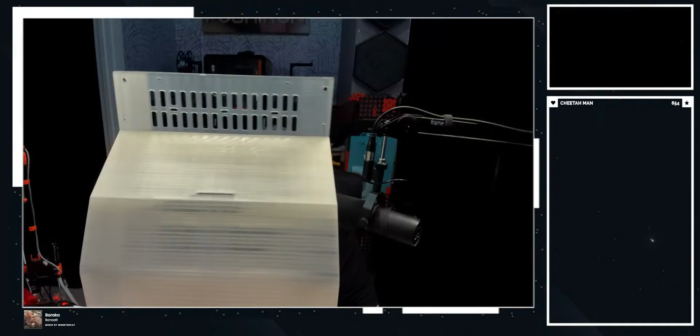So this is the latest version that we've printed off. Now this version was going to be kind of like the final prototype that I was going to install and see if this worked. But we have one problem, and that is there's a hole right there. Looks like I accidentally made a chamfer that was way too small on the whole thing.

So there's a hair in it. What's up, Robin? What's up, RJ? What's up, Geek Toy Box? What's up, Tin Talon? How's it going?

But one thing that this is also doing is a test for side plates. So that works. It kind of wants to fall out, so we have to figure out.

I know who you are, Geek Toy Box. I know you, you're my brother from another mother, Robert Anthony.

Anyway, so we have to figure out a method of attachment for this. Which that should be easy, just like a little flange with an M3. Should work just fine, and do that on both sides.

So that's what I'm thinking. Trying to think of anything else we have to do with this. I didn't turn anything on.

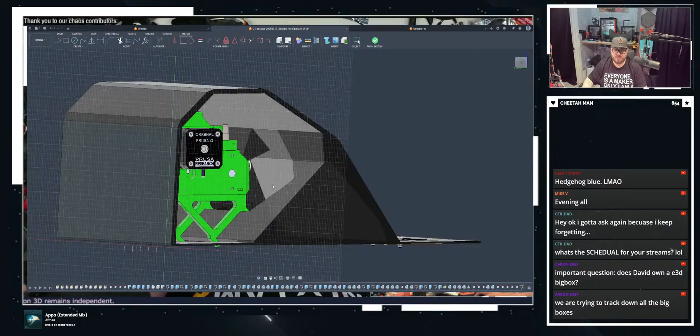Delete. Okay, now what we're going to do, real quick, we're going to create this. Now we will project that onto there. That is just for line reference. All right.

I'm gonna go ahead, extend that, and then from there - there we go. Okay.

I'm doing this the wrong way, but I also don't care. There we go, that gives us our center line. So we're going to do 4.2. That's 402. 4.2. There we go. Just right there.

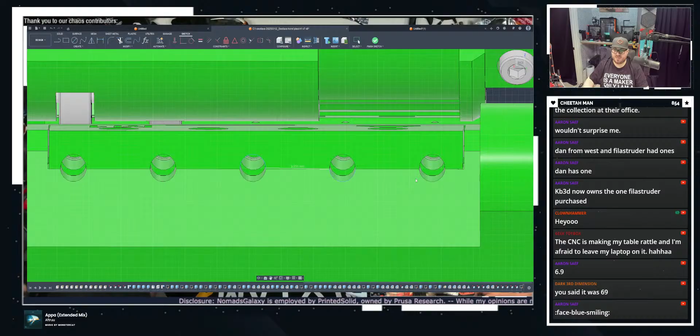Hold on, clear selection, let's do the bottom ones. 9.9. Okay, 9.9 is what we'll go with. Okay, so go here - rectangular pattern.

We gotta do this the fun way. 9.9, okay there we go. And then circle, but it's going to be a 2-point circle. That's going to be 4.2. Okay, do that one more time. That's a 2-point circle again. 4.2. Someone's gonna be yelling at me for like, why are you doing it this way? I'll be like, because I am a self-proclaimed masochist.

You should hear the story about how Dave Randolph designed the next-gen enclosures. He did it in an even worse way, but he did it great. By worse, I mean, oh my god, why did you do it this way? The program he used was the program that is for slicing. What he did was he programmed and designed the next-gen enclosures in a 2D application. He did not design them in a CAD. It is all 2D, there's no 3D modeling at all. It is just the raw CAD, or just the raw 2D laser files.

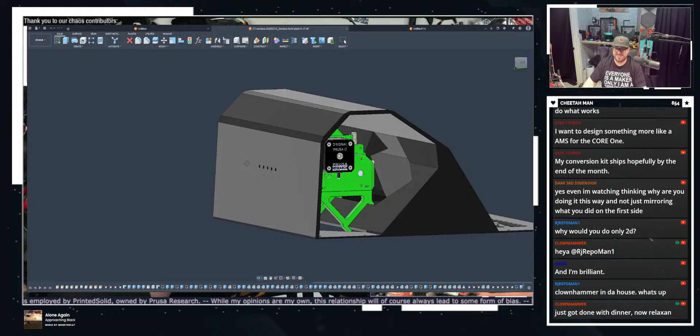I would not be able to do that. I cannot just think in 2D. There are some aspects of design that I could, but I am very reliant on visual. I am very reliant on, obviously, printing out test pieces and seeing how it looks still. Very reliant on that. So the next part we have to look at is we want to...

So that fits really nicely. That fits perfectly. That allows for print tolerances to be off and allow for things to connect just nicely. So we have to now account for mounting holes, essentially, just little spots to put an M3 screw. Now, I think we're just going to put a hole all the way through the whole assembly so the M3 holes don't really matter where they are. So I'm thinking one right here, one right there, one down here, and then one in a corner, I think. That should work, I don't see a problem with that. So let's figure that out.

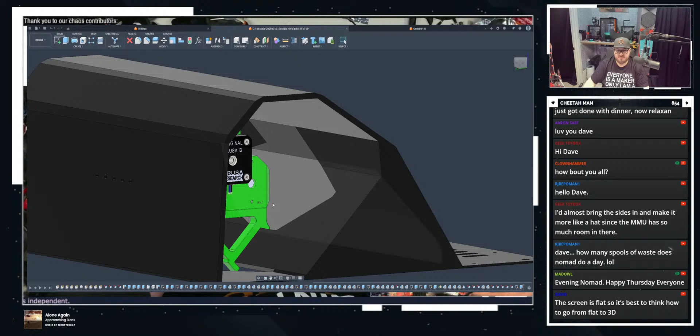Meanwhile, me and my fancy dancy space mouse. Okay, so now we just centered those holes because they were not centered, and I knew that if I were to release this, that would drive someone crazy. So that's now centered really nicely.

So, okay, let's go ahead and reveal these bodies here. All right, so right here is a great spot for an M3 bolt, so we're just going to do that. And we're just going to kind of bring this wing out a bit real quick. One second.

I don't have a... I'm just kind of vibe CADing. Are the holes centered on the MMU? So the MMU is, at least in this CAD, not centered, it's just kind of in a position. But in the official version, when you actually print it out, you can slide it back and forth a bit. So I want the holes to actually be in the center of the design, and then you're going to be able to find the center. If they're a little bit off, it should be fine. There's enough play in the PTFE to not cause too many problems. We'll see.

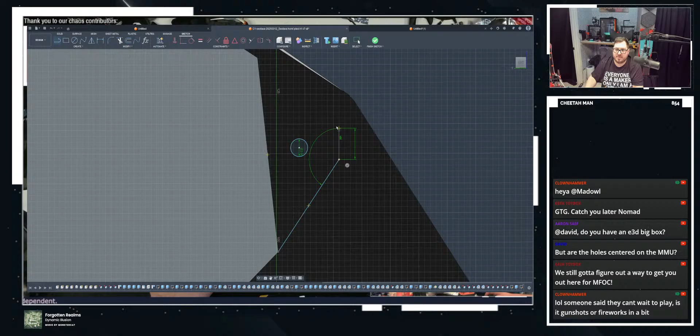All right, does this account for just a random M3 hole? Oh, that is way too small, that's going to cause problems. Okay, how about we do this instead? We're just going to put an M3 right here, so just 3mm. And then going off our really geometric, lazy design here, I'm gonna just do that. There we go.

You would know that if you did it in 2D. Yeah, uh-huh.

Probably. Alright, so here's a little trick that I like. Again, someone's gonna yell at me and be like, oh, you shouldn't do it this way. Actually, I already effed up royally, but whatever. I'm going to just go ahead and remove this body. Let's rename. Let's just remove this, because I am just going to mirror this when done. This CAD is literally like an example of the worst of my CAD. It's not well organized, it's not well anything, it's just chaos.

Anyway, so what I like to do in here, we're gonna go hit thread here. We're gonna set this to an M4. Nah, M3.5. So M3 will go through that perfectly fine. Well, actually no, hold on a second. M4. You can just use a hole tool. I like to use a thread tool because I'm insane.

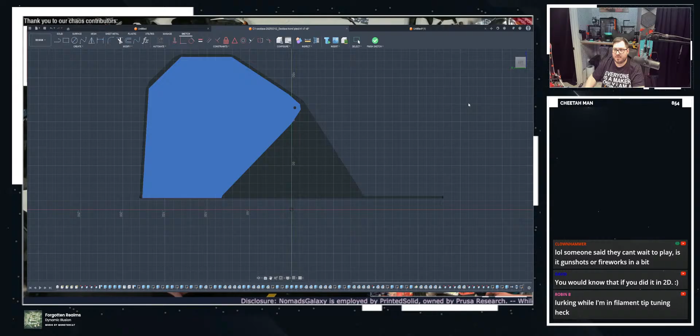So now, we're going to do this, project. We don't need to project the whole face. Just that. Okay. Finish sketch. Punch a hole all the way through to the other side. There we go. Now, we hide this. Now, for this, we're going to use the thread tool. Now, I'm going to do M3 modeled.

Now, your printer, especially if you have a Prusa, can easily replicate the actual threads of an M3 bolt. This is not a difficult thing for a printer to do. This will work perfectly fine for just holding something in. So that's what we're going to work with here.

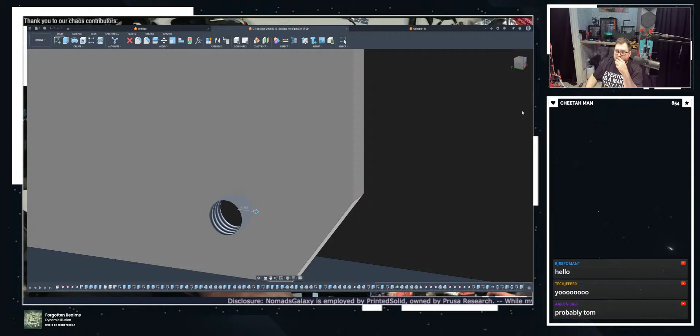I'm so doing this the worst way possible. If I showed Mitch how I was doing CAD right now, I think I'd make him cry. Mitch is a freaking wizard of parametric CAD. He figured out how to do some stuff at work, and it's fully parametric, and it's insane that he was able to figure it out. Dude's a wizard.

Isn't it 3D? I really should change the name of the stream. If you think you would cry, you're doing it right. I guess so.

I wish I could show you some of the CAD I do for work, because I assure you, it is way better organized. I promise you. I actually go into the subcomponents and only model them when needed. I actually tile things out appropriately. I do a good job, but when it's like this... At work, you're going to do a really nice job. It's going to look really good. But then at home, you just kind of slap things together because you know it's going to work. At least I don't have any red in my timeline.

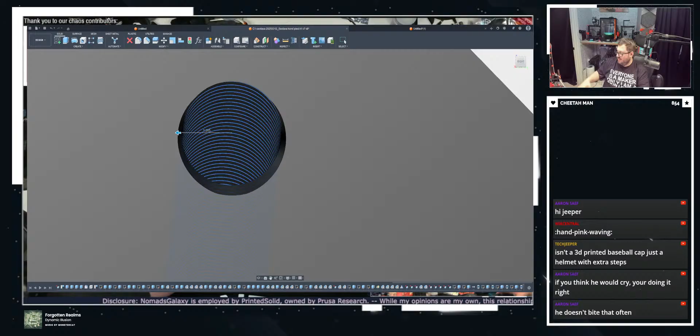One day... Well, if you want to see the kind of CAD work I do at work, just download the Positron CAD. It's similarly done. It's actually organized and easy to understand. So, there you go. That's the one thing you can look at. Eventually, there's other CAD projects I've worked on that are also similarly organized. I just can't think of anything currently.

Okay, so there we go. We got two points that work.

Can we get a Dave interview stream? I would like to do that. I would very much like to do that, actually. Honestly, working and talking with Dave is truly just an awesome thing. Definitely one of the highlights of my career. I was saying today, we had a little party today, and it was so much fun. People have told me this, but I can say with absolute certainty that I'm so happy where I am right now. I'm like welling up real quick.

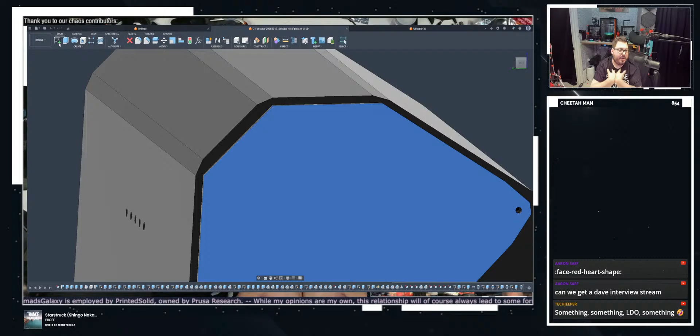I've been in the IT field for 10 years. And I was really nervous about this job because when you do something for 10 years, most of the time you can say that you know how to do it and you know how to do it good. And I know how to do IT. I'm confident in my IT skills. I know how to be a network admin. I know how to set up servers. I know how to do this, that, and everything else. I am confident in my ability to be an IT administrator.

When I was prepping for this job, I was honestly really worried. I was terrified because I went from one job that I've been doing for 10 years, and I've been told that I was doing it well, to a job that I have no formal training on. I have absolutely only hobbyist level skills in, at least I would like to believe.

I was nervous, and I think anybody would be. It's entirely normal and natural to be nervous making a jump like this, going from doing just IT work to then professionally doing engineering work with no formal education on the matter.

Weeks, if not days after I started at Printed Solid, my dandruff went away. My general anxiety was significantly reduced. I had a reduction in my depressive episodes, and this weight that was on my shoulders just lifted.

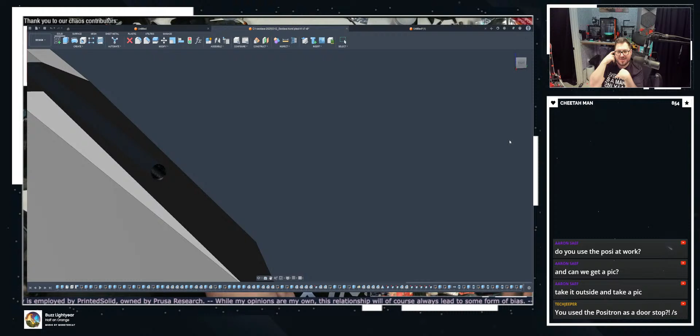You use the Positron as a doorstop? No, no. We printed a Hodor doorstop. It's great. I love it. Came out perfect. Best part is I printed it on my Positron before it broke. I still need to fix my Positron.

I will say, when I go to Open Sauce this year, it's going to be the first time I don't bring a Positron with me. I'm gonna be packing light this time. I don't want to bring a Positron because I just want to be able to bring my clothes, and I don't want to have to worry about it. Essentially, when I was going to Rocky Mountain, when my flight got canceled, my Positron was in my checked bag, and that ended up in Colorado while I was still stuck in Philly. So I don't really want to, I don't know.

With the current tariff situation, it's difficult for me to justify bringing my Positron, because if anything were to happen, it will not be cheap to get a replacement. Like, if it was before the tariffs, I'd be able to be like, hey, Jason, this happened. What can we do? And Jason would probably be like, here's a new Positron. That's no longer plausible because of how expensive it would be to do that. So, yeah. Get a medical device sticker? Right. Maybe. Don't know. I'm not allowed to do that. Mitch could do that, because he has a CPAP.

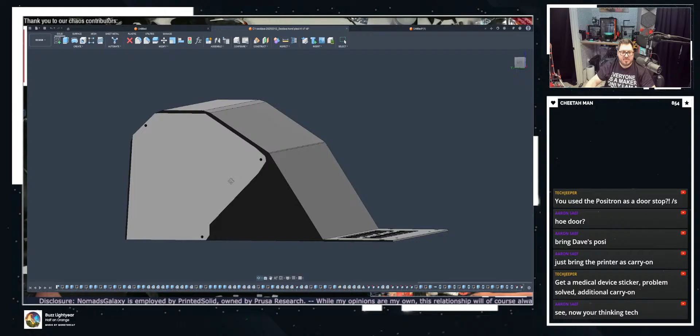Alright, I think... Why is that there? Delete that. I think this is good. This should be enough to just hold it in place. Like, I'm happy with that. Yeah, it's a 3-point hold. That should hold just fine. Yep, okay. So we're going to go ahead and reveal the construction plane. Mirror. Mirror plane. There we go. So just like that, we have the new side panels.

I'm nervous about how thin this wall is. Oh, that's fine. That's 1.7 mil. That's going to be fine. That won't be a problem, especially since I modeled it all the way through. It's not going to be bulging at all. Okay, now, before I decide to print this again, let's just look at the geometry, see if there's anything else we want to do in here. I'm pretty happy with this right now. That's going to be a bit messy, but that's fine. That doesn't have to be nice. Is there a purpose to having it go all the way through? No. I'm just doing lazy CAD.

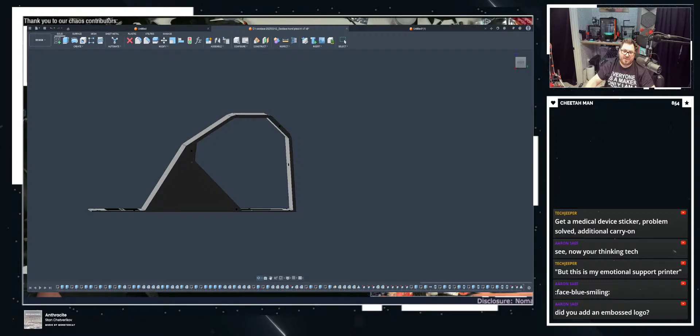This turned out to print really nicely. Did you add an embossed logo. Nah, I'm not going to do that right now. Because this here, it's very thin. To try and give as much room in here as possible, it's very thin. Because if we bring back the MMU, like, I can... Let's do this. Let's give it just a little bit of thickness in spots where we can. Let's actually come in here and start improving some things a bit. Because now that we can do this, this will just make things look a little bit nicer once printed. So now I can go up here, delete that, add that rounded edge, do the same thing here.

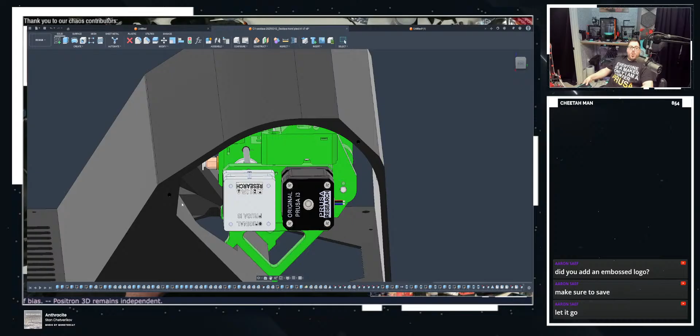It did not like me doing that. Come on. Yeah, okay, it did not like that. I really hope this doesn't crash. You know, that would have been useful to think about a moment ago. But now it's frozen, and I did not think about saving it a moment ago. I should have done that. Alright, well, we wait now in terror, as we wait and see if everything I've done gets lost. Oh boy. Let it go.

The mouse is spinning. The mouse is spinning still. Still loading. Oh, yeah, thank God. Save. Save. Save. Okay. Alright, we Gucci. We fine. We good.

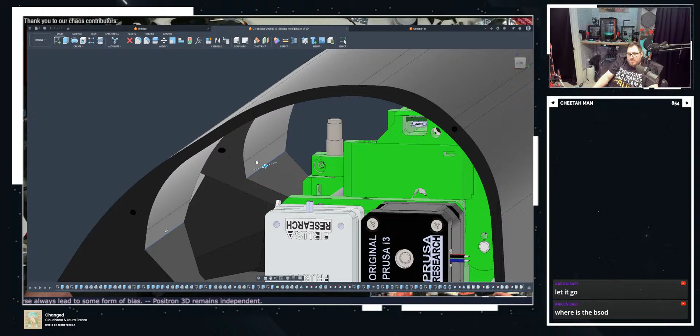Now, admittedly, the more geometric shape of this matched the design language of the Core 1 a lot better. But I don't want it to be a big box on top of the Core 1. I'd rather it have a little bit more personality. So, yeah. That is already so much better. Let's see. Yeah, that is so much better already. It's also gonna just print a bit nicer. Just a little bit. Alright, I'm gonna leave this pretty rectilinear.

Alright. I'm going to modify this a little bit because the sliding part is actually underneath these grills. So I am totally fine with this looking a little bit different, as long as we don't change this too much. Oh, God. Alright, start with 20. Let's go 25. 30. Okay. 35. 40. 45. Doesn't like 45. Okay, 42. Doesn't like 42. 41. Doesn't like 41. 40. 39. 38.

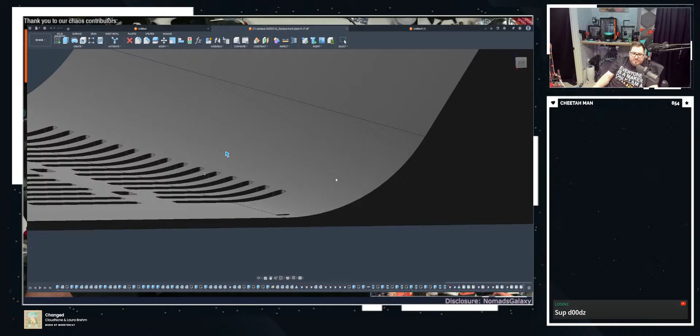That's just going to make things look a little bit nicer. Okay, I'm trying to think what else. It looks a lot better, but now it looks more like a duck bill, admittedly.

Alright, I'm gonna fillet a thing. We're gonna fillet it by doing this. Please don't break. Please don't break.

Please don't break. Note to self, make sure to check the simmering pasta sauce is actually simmering. Yeah, you should probably do that.

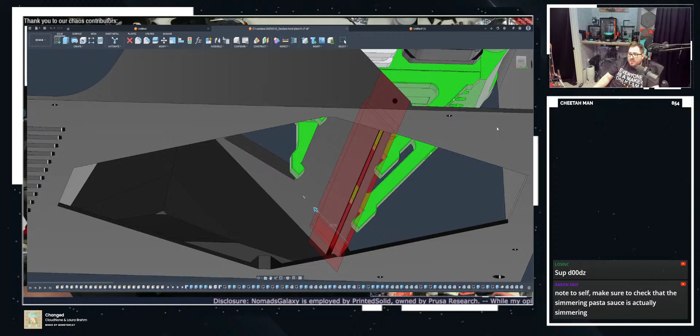Okay. Then we do join. Is that... No, it doesn't get rid of what I want to. Okay. Those threads will just be there. This is fine. This is fine. If I really want to do a really long M3 rod all the way through this, that's going to be great. It's going to be really helpful right there. Okay.

Before I print this, part of me wants to start thinking about how we can make this fit on a Core 1. I mean, the simplest solution is to cut this into 4s. That's entirely possible to do. So if I do mid-plane between there and there, now I can split this into quadrants, and it looks like... Hold on a second. Split body, you, along here. Huh.

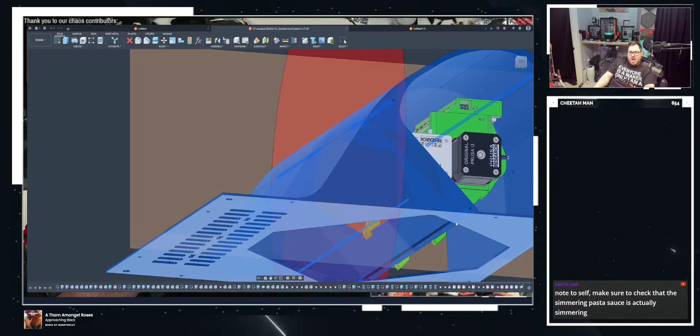I mean, it's going to mess up printability. Only to some degree, though. Okay. That's something to think about. This might work out a lot better than I thought. Okay, so if you do that, that splits essentially these two into two, and it looks like, for the most part, it keeps the MMU chamber on its own part of the print, which is good. We want the MMU chamber to remain independent of everything else. And then when we split it like this, it just splits the MMU chamber into two. So, realistically, we would just have to figure out a way to align everything and to screw everything together, and that's not difficult to do. Pretty happy with that, actually.

Because, yeah, an MK4S bed and a Core 1 bed is roughly larger than half the size of an XL bed. So splitting up into those quadrants shouldn't be difficult to do. It's all the alignment that we have to do after. That's the hard part. Now, I could tell people that you have to use glue. That's not an unnecessary thing for people to do. And that actually can be made relatively easy. But with how thin the internal geometry of this is, that actually wouldn't be that simple.

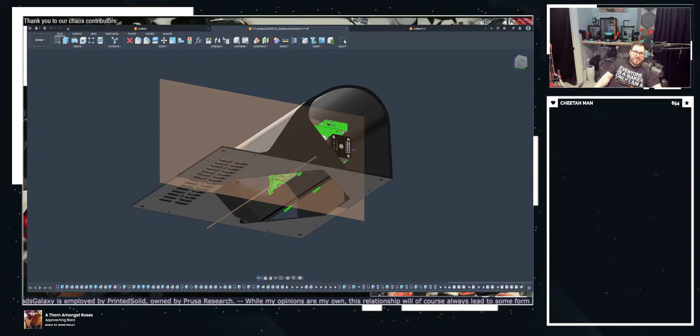So, let's see. I have no idea how this would work, but you know what? I'm gonna print this all in one go, and then we're gonna try. So save as mesh. Baseball cap rounded. I'm gonna pull out the slicer. Now I'm gonna try and make this use as little filament as possible. Can't be too little, has to still be enough. But I would really like to not waste a lot of filament on this. Okay, Prusament PLA. Sorry.

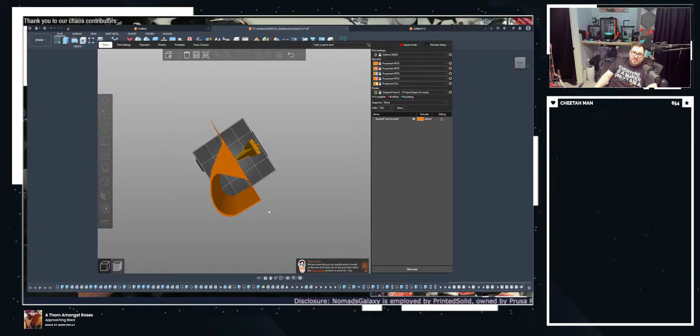Okay, here we are. Now, I designed this so that you can print it like this if you want. There's going to be some overhangs if you do it like this, but this is a completely valid way to print this. I prefer this way. That's just me. So we're going to go ahead and rotate this 90. Yep. Put that right in the middle. There we go. Okay. Now let's do 0.25 structural. We're going to go into settings here. Yep, we're going to leave that. We're going to go infill. We're going to go gyroid. Or we could do honeycomb. Let's see what honeycomb looks like when we do that.

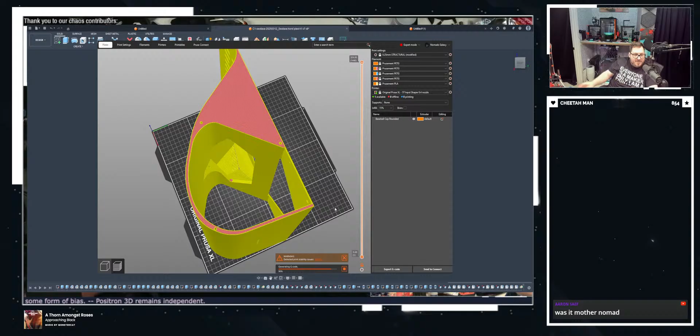I gotta text somebody something. Alright. I just issued a mission to somebody. That's gonna be fun to see the result. Was it Mother? Nah. Anthrocon is happening currently, and I have friends. I have two friend groups that are going to that. One of them is from the Positron group, and another is just other friends that I've had over the years.

And so I just messaged my friend in the Positron group. I said, "Hey, find this group," and I sent them a photo of what they are likely to have as a logo on one of their shirts, and I said, "Tell them Nomad sent you," because it's gonna be really funny if they run into each other. So we'll see what happens.

Okay, I am happy with this. I really am. I don't know if I can improve upon this currently.

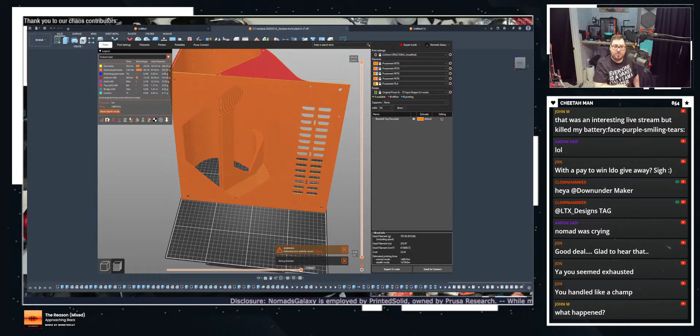And I think this is more of a cultural difference between LDO and the United States. I don't believe they fully understand the legality of how some giveaways work.

And very specifically, since we are not doing a contest—this is not a contest sort of giveaway. A contest needs to be registered in order to actually be legal, because then you are competing in order to win something. A giveaway where you just put your name in requires nothing whatsoever. That's different, because there's no competition needed in order to win the item, and it's equal, because there's no purchase necessary.

There's no legal things you have to worry about. You can just do it. And then the person who receives the item, if it is of substantial value, will have to mark it on their taxes, because it is technically a gift.

So if you received something like a Prusa XL, you have to mark that as a tax write-off, as a tax item, because you have to pay taxes on any items that you win.

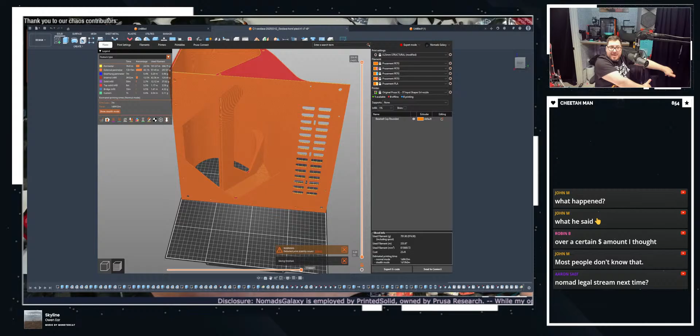And so if you win a Lamborghini, cool, you have to pay taxes on it at market value. That sucks. So be mindful of that. If, for example, you get the option of winning a vehicle or a cash prize, take the cash prize so that the taxes can be pulled from the cash prize, and then you can keep the cash after that. If you choose the vehicle, then you have to pay the taxes on the value of the vehicle, and as such, you can get screwed over if you don't have the money for that. So a lot of things go into that.

Now that I think about it, I think $20,000 is the limit, or is it $5,000? It is whatever is the limit of what can be considered a gift. And I believe that law is very specific to things such as inheritance in a will—if you give a certain amount of money over a threshold, you have to pay taxes on that. I believe. I don't remember.

Again, I am not a professional legal individual, and I am not a financial advisor, so take everything I'm saying with a grain of salt. Please do your own research. Please consult experts in these subjects. I'm hoping to just spread awareness that this is a thing that does exist. It's not necessarily exactly what I'm saying.

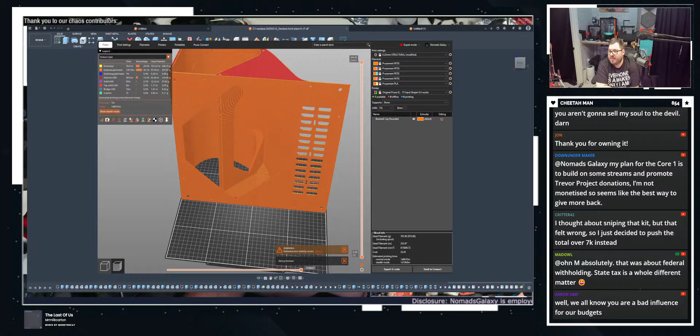My plan for the core one is to build some streams, promote Trevor Project donations. I'm not monetized, so it seems like the best way to give back.

Sorry, let me catch up on chat here. Yeah, people who win the Price is Right, yeah, $600, oh interesting. Hopefully pay to win charity won't happen. Yeah, hopefully not. Don't worry, I didn't get an email about winning, you aren't gonna sell my soul to the devil. Nope, not happening. I thought about sniping that kit, but that felt wrong, so I just decided to push this. I appreciate that, man, I really appreciate that.

Absolutely, that was about federal withholding. State tax is a whole different matter. 100%. Well, we all know you're a bad influence for our budgets. Yes I am. Buy some Jesse. This is a threat.

One of my favorite lyrics is from Streetlight Manifesto, and it goes, this is not a threat, but it's a promise we will keep. The full context is necessary though, let me pull that up real quick.

Streetlight Manifesto, This Is Not a Threat. It is The Hands That Thieve. The chorus literally goes: and I don't care if I lose because my heroes did too. They shouted court should be adjourned because the jury are fools. And the judge can't decipher his left from his right or his right from his wrong. And we will bite the hand that thieves, we will not turn the other cheek. This is no threat, it is a promise we will keep. So what's the point pretending when we've seen behind the curtain and there's not much to see?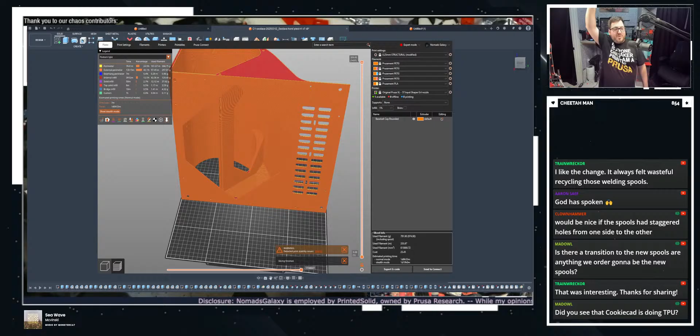David says if you stagger holes, then you would need two different molds and double manufacturing costs. Yep, exactly, it's always those minute details. David's great for remembering those minute details. So many times me and Mitch are like, 'Oh, but we can just do it this way,' and then David's like, 'But just do it that,' and it's like, 'Oh yeah, that's a lot easier.'

The one problem with hiring two people that overcomplicate things - like, yeah, you hire the guy that does the upside down 3D printing, and then you hire the guy that does the backpack printing. We come up with great ideas, sometimes we overcomplicate them way too much. You could say we're a little short-sighted.

That's good. Yeah, minor changes. Alright, so now this uses only 781 grams of filament. I love how we went on that tangent while we waited for this to slice here.

I didn't get here by doing things the hard way, I'm lazy. I have a saying I've been saying for years: innovation is driven by laziness. We innovate because we don't want to do the work. Why do you think we invented texting? Because no one wanted to actually make a phone call anymore, it was just easier. Why do you think we invented smartphones? Because getting to a computer was too cumbersome. We do all these things to simplify our lives and make things a lot easier.

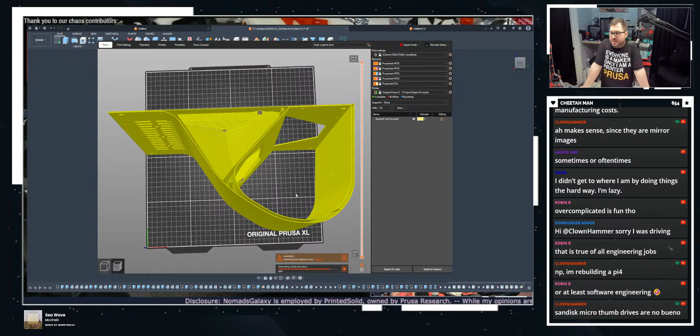Overcomplicated is fun, though. I mean, look at the top hat we're making here - this is definitely overcomplicated. 100%. It will work, and I'm glad it's gonna work, but this is definitely overcomplicated. This is why I do this on my personal time, not on company time. Anyway.

So let me put this on the Core 1 so you can see what it's going to look like. That's not bad. That's not bad at all, actually. I thought it would look like a weird humpback whale. That doesn't look like a weird humpback whale. I like it.

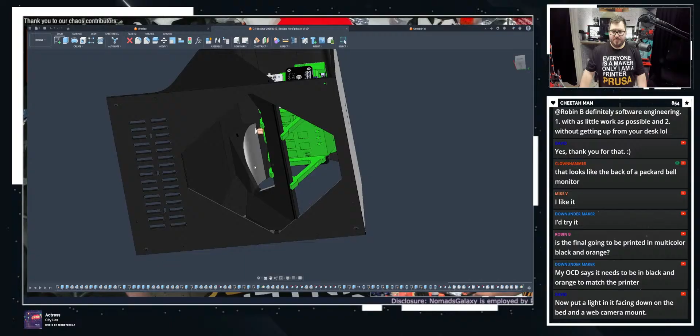So let me hide the construction planes. What we should be able to do is put an LED strip literally directly underneath the MMU here, and that's going to give some backlight as well. These here, you have a lot of space to actually attach LEDs to the entire bottom part of this, because it literally just replaces the top acrylic panel. You can do a lot with this.

One of the things I'm thinking of doing is there's a ton of headers, and I think this is actually a populated board on here, so we can actually look at it. One second. Where is this board? Okay, let's isolate that. Where's the isolate button? Did they move the isolate button? They better not have. No. No. Did they? Show all components. Holy crap, they did. Why would they do that? Well, that's annoying. Anyway, we'll just look at the ghost of it.

There is a lot of unused headers on the MMU. So we should be able to siphon some 5-volt power off of this without causing any issues. So we could use that to power a couple LEDs. Shouldn't be too much of an issue. That should be a very simple DuPont connector modification.

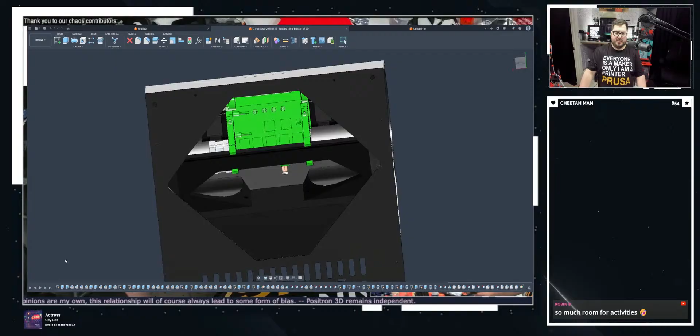So since this is using the push click DuPont connectors, it's compatible with DuPont plugs. We should be able to create essentially a male to female DuPont connector to just bridge the two DuPonts and then literally split off some 5-volt wires so that the LEDs turn on with the MMU.

And technically, I'm just surprised, like, no hexagon shape. We might. This is still prototype proof of concept. I rounded everything off. I'm not a super fan of how this looks. It looks a lot better than the first prototype. Let's be real. This is already leagues better, but definitely already thinking about where to put some hexagons. Definitely already thinking about that.

Everyone here will ignore us till we grow. Hey, what's up, Taylor? I just got back from that Streetlight concert last week. That was so good. So excited for the new album.

So, for context, here was our first prototype. Yeah, this ain't great, Chief. It works. Like, the MMU is able to mount in there, but yeah, this was not good at all. This was the mounting proof of concept. I probably should have not printed this as complicated as I did.

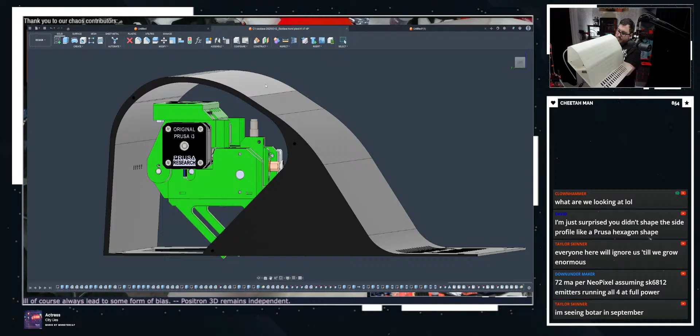This was the previous iteration. And you can access, I'm using the Ulti-Multi. What's nice is that I can actually get my hands in here and do some blind stuff. Obviously, the PTFE tube fits really nicely, so that's good. Actually, removing that PTFE tube is not necessarily easy, but if I kind of hug it, we're definitely going to have to design like an access door. This is gonna be one of the oversights of this design, like 100%.

Oh, come on, seriously? Did I say this was a prototype? Oh, come on. This isn't wanting to come out. Oh, seriously? Got it. An access door would go a long way to make this whole situation a lot better. There we go. So now let's look at the new one.

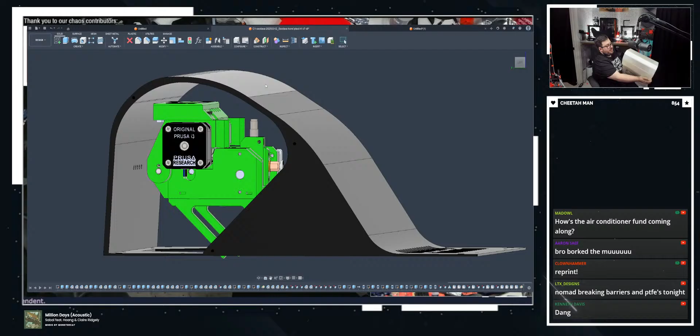Okay, so let's go ahead and put this in. I do really love how that just clicks in. I mean, we could design a hatch for access. I feel like we have enough material to do that. I'm thinking here. The question is just how would we seal it? That is the important question. How would we seal said hatch? And honestly, I don't want to deal with that right now.

But we do have to deal with the cable. We have to figure that out. I can't just do the cable as it is right now. It has to come out the back. So what we need to accommodate is this connector here.

VHB. Yeah, VHB is something we can do, but Nomad breaking barriers and PTFEs tonight. There we go. Alright, so...

The MMU is not designed to be mounted in this orientation. It really relies on gravity. Okay. So, we have to account for this connector here. Just out the back. And then, honestly, a hole only as big as this would not cause many issues for anything. So...

Okay. I do still love how this turned out in PETG-CF. This looks so good. Anyway. Let's go ahead and just unplug this. Yeah, so if we look at this, actually there is a, hold on, let me swap over to the live view here.

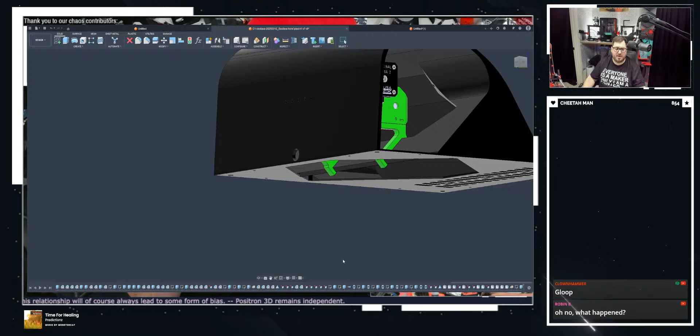There we go. And then the MMU cable will just drop down through there, connect to the MMU. Now, what I could do is on this side, I could make a little insert that is specifically designed to go around this cable. And that's what we'll do.

Who's messaging me? We'll find out in a second.

So that's going to be 8.4. Yeah, it can be TPU. Alright, so we edit this again. And then we're just going to do simple. Right here, 8.4. I'm going to bump it to 8.5 just for some safety margins here. And then I'm going to take this, extrude this out. What? The object you're creating is not visible. Oh, well, that's why. Alright. Yep, 4 mil should work.

Okay, and then what we'll do here, another new sketch. I want this to kind of just slot over the cable. It doesn't really need anything fancy. So we're just going to drop that down. Use offset. And then we're going to do 2 sides. And then, so we did 8.5, so we want to do 4.25. Sketch. Oh. Shit. Go back into the sketch. Okay, that's being weird. Let's connect these two, I guess. There we go.

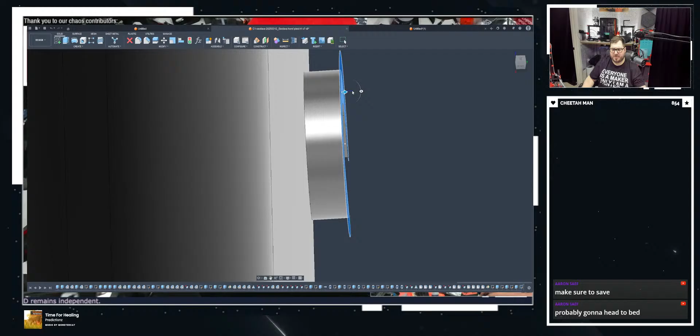Alright, then we just take those, and we drag that out a bit. Just needs to be like 2 mil, nothing crazy. There we go. And we just take this, and that, and we're just going to kind of round that out a bit. Just like that. There we go. Take that and that, do the same thing. There we go.

All right. I'm really starting to think that I'm just going to make this a thing you print on the XL. Because the idea of... Oh, shit. Oh, no. I forgot to account for this. These are still geometric-ish crap. Hold on. Gotta remove a body. Remove. Okay. Hold on. We can fix this. We can fix this. Left.

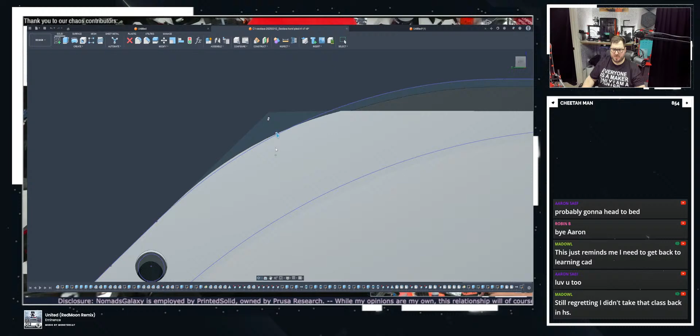Project. Okay. Finish sketch. Okay. Then what we do here is we just go in. Watch this. Watch this. And we just do this until it kind of matches. Again, not the way you should be doing this. At all. But it works.

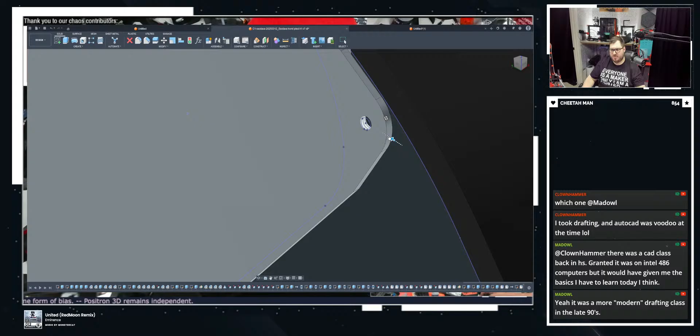Nah! Too much. That's touchy. There we go. That's okay. That's really touchy. Wow. Okay, hold on a second. Let's just do that. You and you. Okay. Then you. Nope, not you. Then you. And you. Oh, God. Okay, there we go. Cool.

Okay, then add new. Done. Whew. There we go. That makes my life easier. It's not perfect, but it does kind of unify the design language that we've moved to. So, yay.

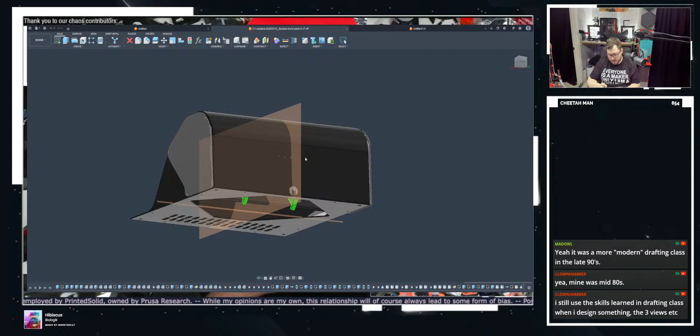Now, I've started adding an Easter egg to what I CAD, and I'm gonna let you guys in on this Easter egg. Actually, do I even have it uploaded? I don't. Okay, I'm gonna have to upload the Easter egg and then show you guys another time. Essentially, I've been putting Callie on as many things as I can, because why not? What's fun is that if it's for work, I put a little doggo, little Jesse.

Okay. I think I'm happy with things. It's alright if that's a little, you know, edgy there. Oh, excuse me. Where's the isolate button? There it is. Yeah. Chamfer. Let's just do about right there. Pull that back. The MMU does not require ventilation, from what I understand. So this should work just fine.

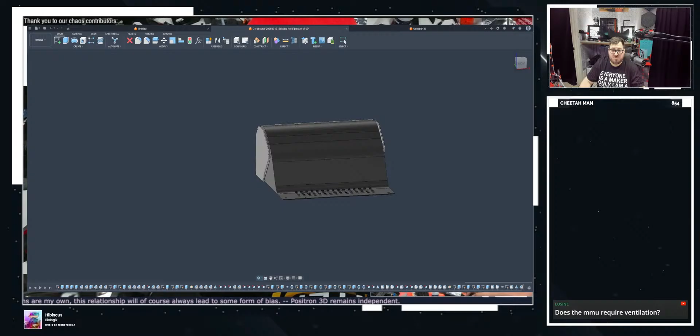Alright. Unisolate. There we go. And hide construction. Alright. Save. All right. I wouldn't call it stylish, but you know what? I'll take the compliment.

I wish I could do more, but I need to keep this part flat because this has to remain essentially as thick as the original acrylic, especially in this middle area here. Because if that was any larger, then that would just be problematic. So I have to leave that.

I missed a boatload. Family is very confusing. Well, hey, welcome back.

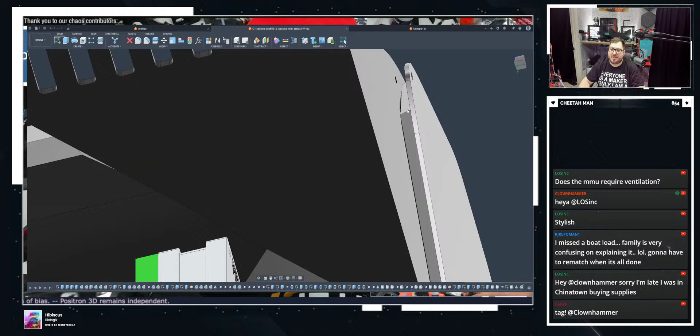This should work. Oh no, this won't work. Oh no! We changed the internal geometry. Okay, this is a relatively easy thing to fix, but we did change the internal geometry. So I'm gonna remove this mirror here. Alright, we're gonna isolate this. Because we changed the internal geometry, all of this is now broken.

Unisolate. Let me isolate you. Why won't you let me isolate you? Okay, fine. Alright, so we have to delete this. All of this. Yeet. Yeet. Yeet. There we go. Deleted. Okay. So, take this back.

So we're going to go ahead and create a sketch plane right there. Okay. We're going to project this. Okay. Now we're going to hide this. Now, what we're going to do is we're just going to take that internal, hit cancel, internal chain selection, that whole inner portion. And what we're going to do is we're going to just drop that by about -2. Just like that. Okay. Finish sketch.

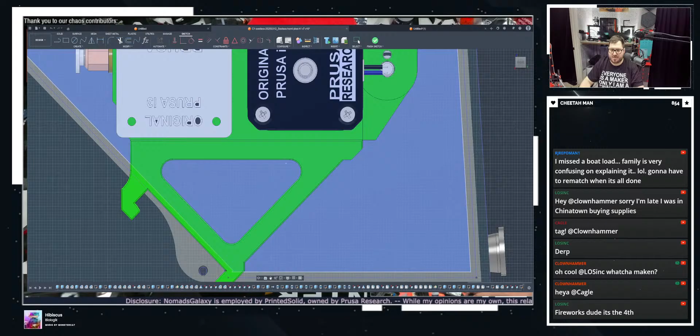Reveal the sketches again. And we're going to take that. Yeah, that should work. Actually, let's undo that. Nope, let's redo that. And we edit the sketch. And let's edit that to -3. Just want to see if that changes this corner here. Yep, it does. Okay, cool.

Okay, so then we grab this and we extrude this by like 5 mil. 5 mil will be just fine. Hit join. Now we have this internal thingamajig. So we're gonna go ahead and round this a bit. There we go, just to make things a little bit easier for us.

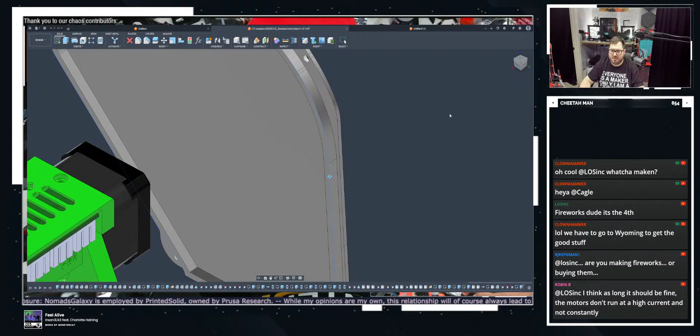Okay, now we take this and let's see. Will this let us? No. Okay, let's undo what we just did. And let's see if this lets us do what we want to do. Okay. Let's do equal distance. Okay, so let's go over here and do it there. And then whatever this was, let's paste it. Okay, so let me do that. Cool.

That's weird that it stopped right there. Okay, so let's do it again. Oh. Uh-oh. It didn't like that. Okay, we're just going to remove that. Okay, that doesn't like that either. Just do that much then. I'm not liking this. Like, this will work. This will work, but I don't like it.

What I don't like is this corner here. I really don't like that. So what I'm going to do is I'm going to select that. We're going to hide the MMU because the MMU is just getting in the way. Take that. Oh, I see why I really don't like it. Okay. There we go. Finish sketch, and then we're just going to flatten that piece. There we go. That's much better. That is so much better. Holy crap. Alright.

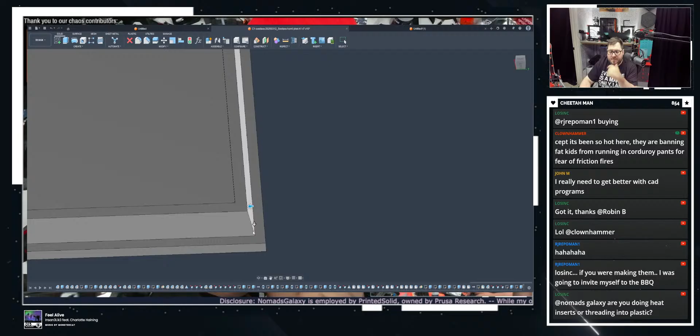There we go. So by removing that little spur that we had there, immediately everything's going to fit. If we bring this back in... Yep, that's fine. That is a totally fine thing. That works. Oh, hold on a second. Did I forget to measure this? What's the distance? Oh, yeah, we're fine there. Alright. Okay, that looks a lot nicer now. Especially now that that kind of works with everything.

I'm happy with it. This looks weird. I don't really know how I'm gonna fix that. Let's try. You know what? Let us try and fix it. So let's do this. Let's do the offset here. Now let's kind of line it up right. Let's do this the right way.

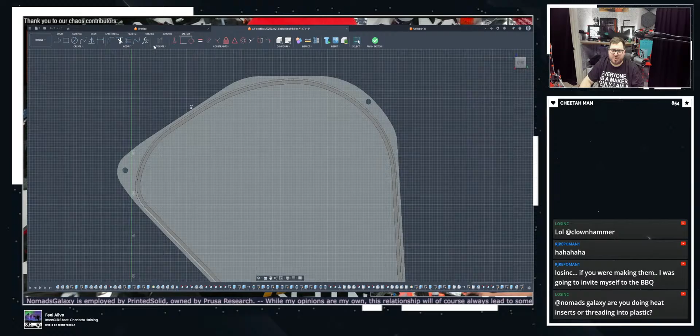Let's measure the distance between these two. It's 1.75. Okay, so we're gonna go in here. We're gonna make that 1.75. 1.75. Okay. There we go. So now, yep, that's its own thing. We leave that. This is just us trimming some stuff up. So yeah, this is the only weird part. We're gonna hit finish sketch, and we're just going to slice that off. So now it is uniform to the shape of the entire piece.

Oh, that's so much better. Look at that. That's just so much better. It's subtle. It's very subtle. But it's better. So we got 3 points of contact. That does mean that this is kind of going to be a little loose, but like there's not much material for me to work here.

Needs some branding. It does, but for now, we're not going to worry about that. Just don't want to be bothered. Branding is fun, but it does take effort.

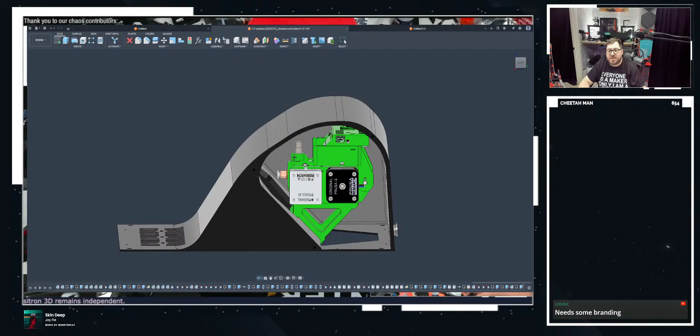Alright, I'm really trying to think what else is critical. What else do we really need? What do we need versus what is a want? I want to have a hatch here for accessing the MMU. And that does technically count as a need. Like that is technically something you need, because trust me, you want to be able to access this thing. But can I live without it? That is the question. This is going to be multiple prints.

Or is it different colors for multicolored? I mostly use my MMU as a buffer, so I can have multiple kilograms of filament loaded into one machine. That's how I normally use it. But yes, I typically do have a contrasting color in there as well. So if I'm using black, I'll typically have white, so that I can do things like text and whatnot. So yes, it is mostly for filament runout, or what Prusa calls spool joining, but it is also for multicolor when I want to do it.

Oh, talking about the Fusion screen, it's black and gray. That's a new feature that you can enable. It's a preview feature. All right.

Yes. More RGB, access to the MMU3 is a must. The RGB can come later with tape. I'm not worried about that. I am worried about access.

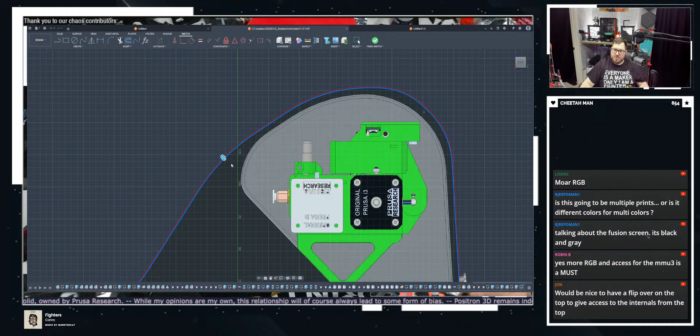And my problem is I don't know how to solve that problem right now. Yeah, I'm thinking of flip top cover as well, but I'm trying to figure out how would I... Hold on. I may have just figured it out. So let's go here. Let's do a reverse. Okay. We're gonna hit OK here. Alright, so we're gonna do it just above this hole here. Yeah, right at that green line. Okay, watch this.

So I'm actually gonna do circle, 2 point. Just like that, right? Watch this. Project that line. Done. Okay. Now that's weird. Oh, right, because it's... Yeah, that's gonna be a thing. Okay. That's all the way through. I could reutilize that.

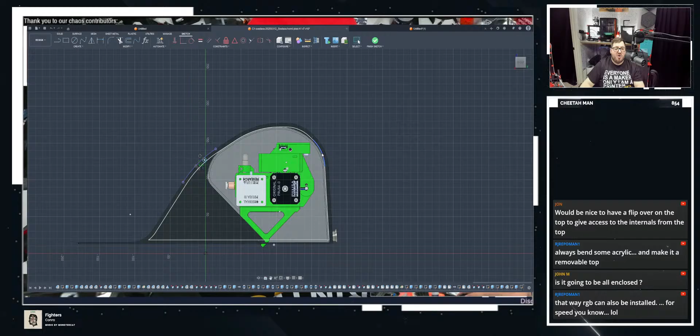Do I? I could reutilize that as a pivot. I could make this a really simple thing. I'm gonna have to add a screw point down there, though, if I do this. Okay, so we're gonna do it. Essentially, go here. We're gonna do to here. Then have that attached there. Make this a 90 degree.

Dave recommends removable instead of flip top. I'm thinking that as well. So if I bring that there. Okay, so watch this. So finish sketch. Here's my idea. I'm gonna have to modify this piece a bit, but here's the idea. If I just slice this right here, look at that. That gives me full access to the MMU. Minus like right here, but that's as easy as me just trimming this away. If it doesn't yell at me for doing that.

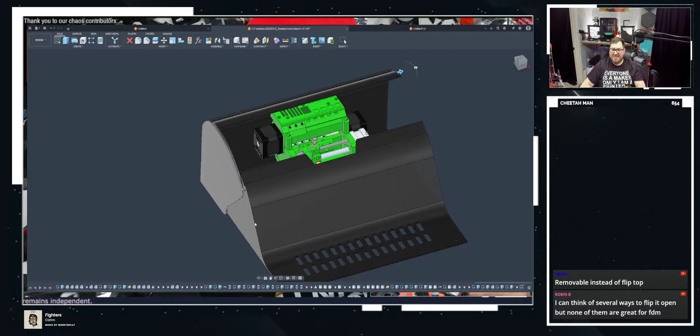I can hear David judging my CAD skills. All the way from Delaware. Okay. I'm judging more than just that. Hey, my life decisions are my life decisions. If my phone starts ringing, I am definitely blaming you, Robin. Or, RJ, sorry. Read the last name that was on that screen there. And that was the wrong name.

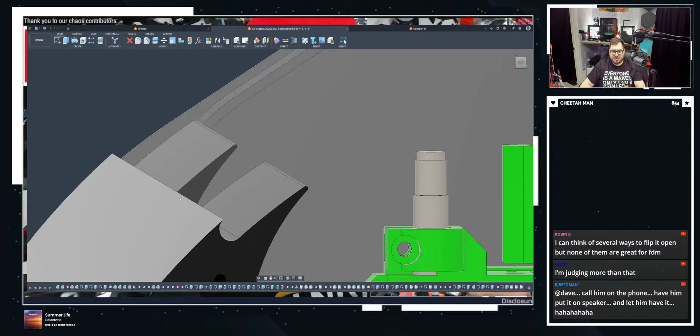Okay. So, if we bring this sketch back. Wrong sketch. We bring this sketch back. And we just go right back in here. Oh, hold on. We got to trim that away. So let's undo that. Is it not 2? There we go. Let's set that to 1. Perfect.

So, okay, hold on. If we do this way, that will have a little bit of a clasping force, which I kind of want, because that can help hold it in place. A little bit of support there. That looks like it should work. So that gives me full access to the top part of the MMU. Full access. Completely unrestricted. So now we pull this back. And then...

It's your stream. Blame who you want. Exactly.

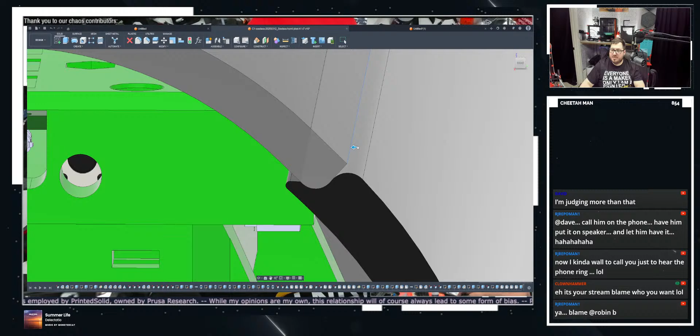Alright. Now, I'm doing this entirely the lazy way. And I should feel bad about myself for the way I'm doing this. And I will feel bad about myself for the way I'm doing this. Let that be known. I don't even know how I'm going to print that. That's not printable. None of this is really printable at all. We've just designed something that's, 1, a pain in the ass to print, and 2, I'm going to hate myself when I do print it.

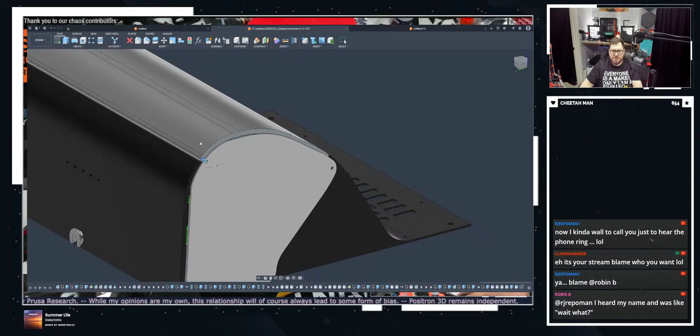Royally. But this gives a full-on access hatch to the MMU so that I don't have to take the whole damn thing apart. This likely will cause a little bit of clamping force, potentially. Don't know. I don't think it has enough of a bite to really do anything, but we'll see how it behaves. So the idea right now is that let's just grab this, project that circle, finish sketch, punch a hole through. Okay. And then modeled that right there.

Yeah, I'm thinking hinge based right now, but just using an M3 screw in from the side. Simple. I'm really not trying to overcomplicate this, but I've already overcomplicated way beyond what is necessary. So let's look at the construction planes. We're going to mirror this. There we go. Okay.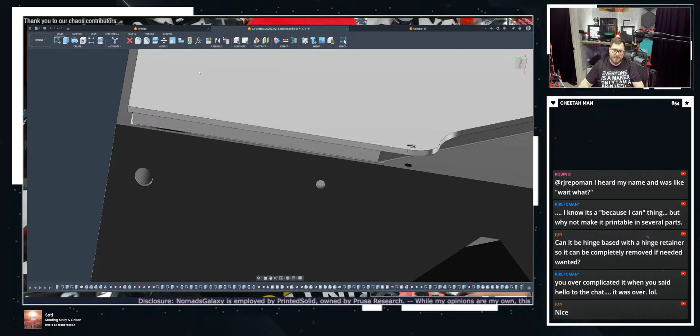So here's the downside to this idea. We have just removed a point at which there can be an attachment done. And this is relatively thin, but should be fine. Should not really be a major issue. And okay, let's see here. There's still an attachment point here. Still an attachment point down there. I need an attachment point down here. That's gonna be relatively easy. So let's undo what we just did here real quick. All right. Let's hide this body.

You need complicated when engineering. You say that.

Not a fan of this at all, but it'll be fine. Should be fine, really. Yeah, the XL. This is going to be printed on the XL.

Not a fan of it. Not a fan, but it should be okay. Should be fine. It's a weak point, that is a weak point. But that is also not the part of the model that is structural.

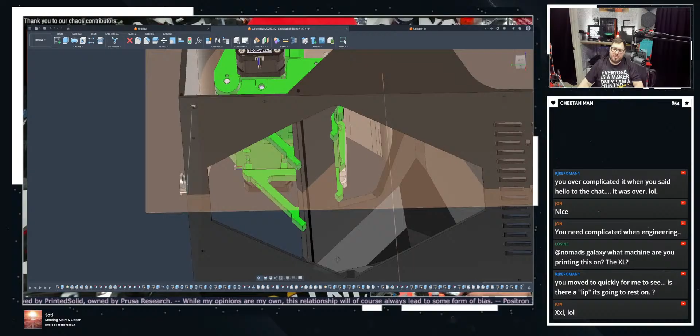Most of the weight is actually in the middle of this part, because the weight of the MMU is immediately put onto the edges and onto the frame of the printer from here, from this area right here. So this isn't really structural, aside from holding up this piece here, which is problematic. Okay, so undo what I just did.

Okay, so we're only going to... the other ones, out of laziness, I did as a through hole. We are not going to do a through hole here, because that actually can and will cause problems. So what we will do is -10. Let's go 15, okay, -15. So, yeah, M3 by 10 will work just fine.

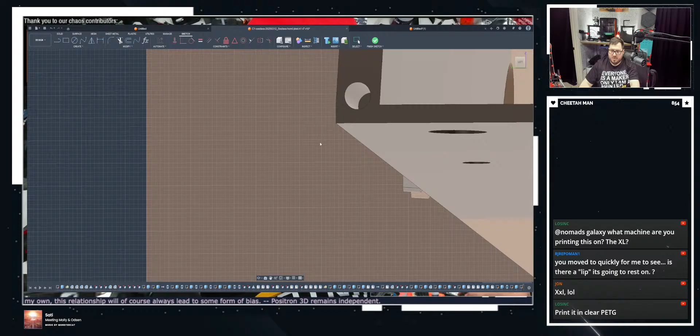Actually, I will just do by 20, that way I can use a longer screw. Now I'm just going to go in here, thread, modeled for M3. Before I do that, I'm going to go to the other side of the model. Create sketch. I'm just going to project that onto the other side.

What the? Oh, whoops. There we go.

Okay, so there we go. Because we're actually doing it properly, we're not being lazy and putting a through hole all the way through, that retains structural integrity here in the middle so that this doesn't just snap off, which is good. We don't want that to just snap off.

Technically, I should do that here, but it's whatever, it's fine. As well as there, again, whatever, it's fine. Okay, now we want to do that up here. So, arbitrary hole. Oh, actually, we need to make sure there's space for the screw head. Right there. Alright, this one, I'm gonna be a dummy.

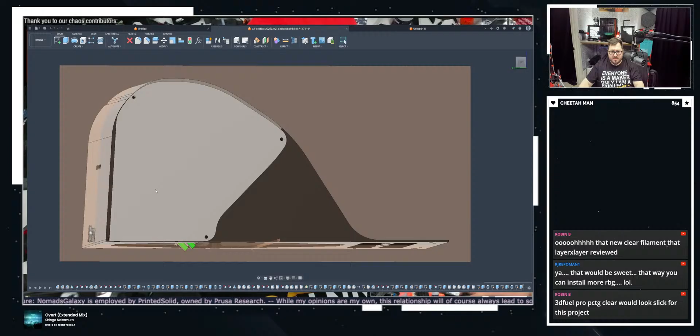Alright, kids, do as I say, not as I do. Okay, so now I need to incorporate those new mounting points. So project, there we go. I should have done this before I threaded that. Whatever, okay.

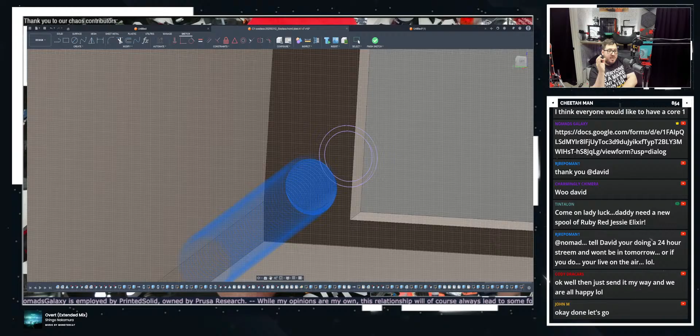But since I started working at Printed Solid, I was obviously very exposed to Jessie, and in-house, all we have is Jessie and Filament. And honestly, yeah, I don't touch anything else at all. I use our PS imports sometimes, because we need carbon fiber. Well, we don't need carbon fiber, but I want the carbon fiber texture on some prints that we do, so I'll use that. But good stuff, I mean, all the projects that we've done in the past 6 months have been exclusively Filament and Jessie. It's great stuff, like, half this desk is printed with Jessie. So, yeah. To whoever wins this, if it is your first time getting Jessie, I hope you like it, and I hope it kind of opens your eyes to a new possibility and a new vendor.

Come on, Lady Luck, daddy needs a new spool of Ruby Red. Tell David you're doing a 24-hour stream and won't be in tomorrow. Or if you do, you're live on the air. Okay, well, let's send it my way and we're all happy. I bet the employee discount doesn't hurt. Yeah.

Fusion is really not happy with this projection. It's still thinking. Good thing we saved recently.

I wonder who's at the top of our leaderboard tonight? Yeah, it's still Robin, leading with 225 XP, with Clown Hammer at 135, and RJ Repoman at 150. A lot of people are tied for 150. The leaderboard is fun.

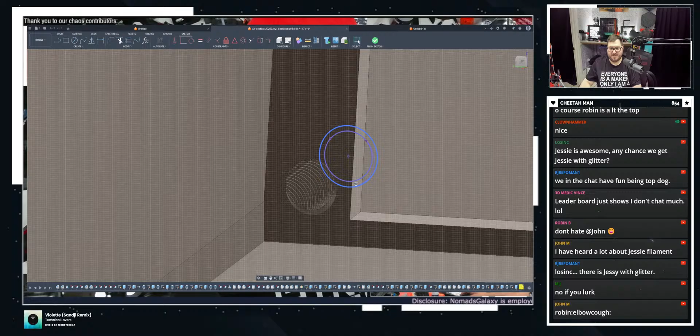Oh hey, Fusion did the thing, save. We're saving, we're saving right now. No, we're not fuffing around with that. Fucking around, what? Okay. Ah no, left. Thank you.

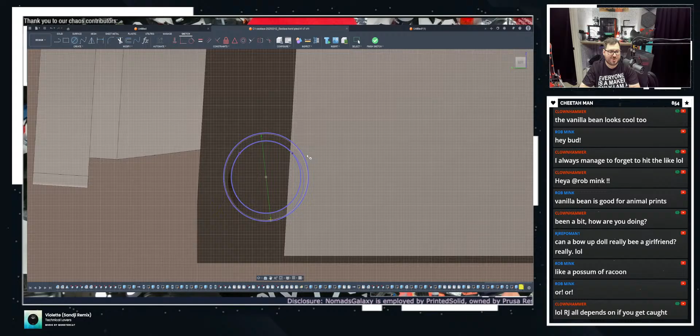What, RJ, what? You're gonna meet my significant other and then you're gonna possibly regret those words. I don't know.

Oh hi, Callie. Hello. Alright, I need to clean that up, I'll do that soon. Shit. Maybe one day, I like to keep that part of my life separate. Like you guys get to see a lot. I pull the veil away a lot, but understand that stuff, yeah.

Come on, Fusion, can you just make the circle? All I asked of you is to make a 3mm diameter circle. That's all I told it to do.

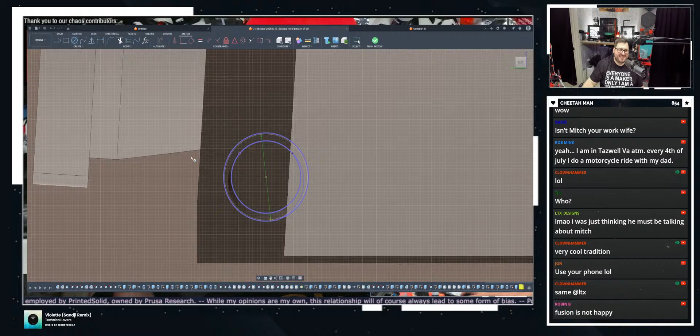Autodesk Fusion is not responding. I hate this program. Fusion is not happy, it hard crashed. Oh my god, Fusion ever happy? No.

I do prefer SolidWorks, I will say that. I have a copy of SolidWorks that I use from time to time. But I just know Fusion better. I just know Fusion better. That's my problem.

I was about to say, don't tell us you're walking around the warehouse oompa loompa doopy dee dee. David, that's why I use Microsoft 3D. What are you and Carl in cahoots? Turn that off because I need to make sure I load the file without showing off anything.

Yeah, FreeCAD on Windows is a struggle bus. I tried to load the Positron CAD into FreeCAD and it crashed the program. So, yeah.

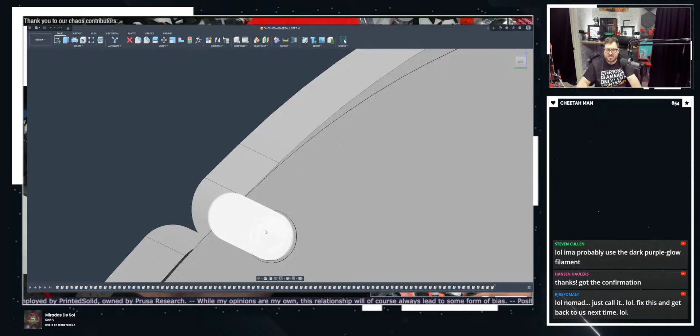This looks fucking broken. What the fuck? Well, maybe some things aren't exactly good. What happens if I hit delete? Fusion hated that. I'm gonna have to fix that. Okay, I'm gonna fix up this model on my own time and do other things that I have to do on this model. Things are broken. Things are very broken. So I will fix this later.